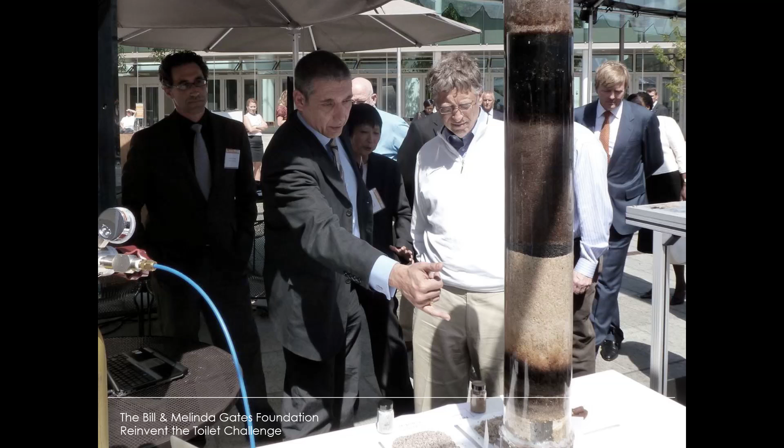And indeed, José Torero's interests are broader than the fire safety of complex environments. They include sanitation, waste management, and contaminated land remediation, betraying an inclusive approach to designing our world, an interest in enacting and preempting rather than simply reacting. As a winner of several prizes for the communication of science, he's shown here imparting his ideas on human composting and working his magic on an interested computer entrepreneur who just so happened to sponsor a new toilet challenge with the Dutch Crown Prince shown in the background.

In 2012, Professor Torero joined the University of Queensland as the new head of the School of Civil Engineering. And from what I understand, he's adjusting to Brisbane's climate very easily, possibly a climate of comfort to his now even more hectic professional schedule from down under. He continues his numerous international editorial, chairing and board duties in the field, but has also taken up research in and on Australia, recently by joining forces with architects to study the possibilities of designing tall timber buildings.

I don't have images from his proposals for additions to the University of Queensland campus, but only a few days ago the Office of Skidmore, Owings and Merrill released the Timber Tower Research Project in Chicago, which involves the participation of José Torero and the University of Queensland. We hope that through events like this we will steer his focus and time back to us, to explore how proper understanding of the elements we've been fighting for centuries can sustain and enrich our future spaces. So let tonight's lecture, How Do Buildings Burn, be the stepping stone for this new adventure. José Torero.

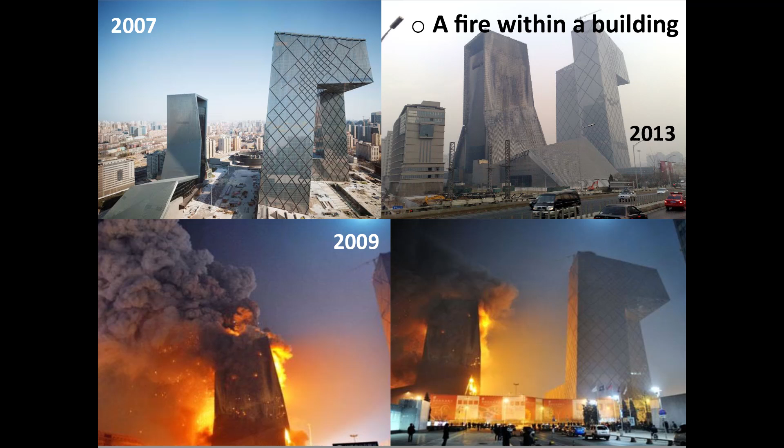Now, the other opposite scenario is when we have a fire within a building. So this is a fantastic building, the CCTV tower in Beijing, designed by a famous architect called Rem Koolhaas. Basically, the idea of this tower is that it's intended to be a dragon. So this is the head of the dragon, and this is the tail of the dragon. Unfortunately, in this particular case, the flames came out of the tail and not from the head. I mean, you're laughing, but this is a major fire.

Now, this is where the problem is. If I have a fire in a building, is this the intended consequence of the fire? The problem is not that I had a fire inside a building. I can tell you perfectly clearly that the probability of having a fire in a building is 1. It is going to happen. It might not happen today, it might happen next week, or it might happen in a few years, but somebody is going to do something that at some point is going to create a fire.

99.99999% of the times, the building will respond appropriately. And all of a sudden, what your fire was disappears. It's contained. It doesn't have major consequences, and it does not make the television.

But there is the occasional case, like in 2009, where a simple firework hits a zinc cladding in this particular building, and fundamentally the entire facade of the building goes on flames in less than 5 minutes. Fortunately, this building was empty because it had just been finished, and it was to be opened a few weeks later, and therefore there was nobody in the building.

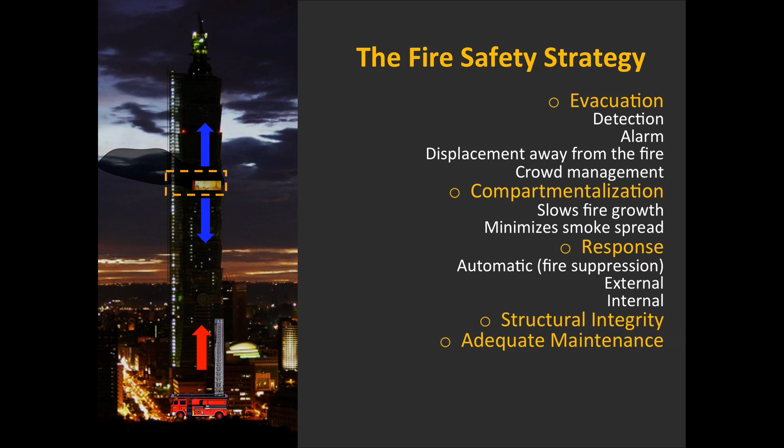A critical and extremely important thing in the fire strategy is that you require adequate maintenance. You're putting all these systems in place, and they're dormant, waiting for the fire to happen. If you don't maintain them correctly, with a proper maintenance program, then the day you need them, they're not going to work. So proper design and maintenance are the things that guarantee the fire safety strategy is going to work.

So in the end, a good strategy leads to an acceptable outcome, and that's the principle by which we solve the problem. The reason fires don't kill a lot of people is because we have a good strategy, properly designed and adequately maintained. Otherwise, when we have a fire, it will always lead to a disaster.

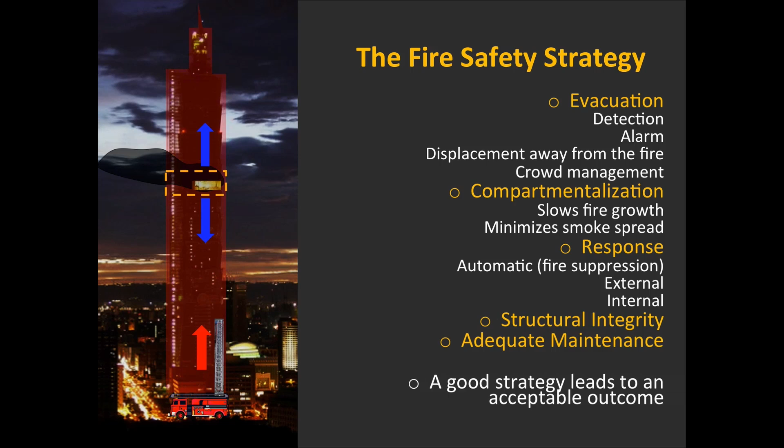Now, the truth is here you have a perfect example of an adequate strategy. Here you have a fire in a tall building that is perfectly contained to a floor, perfectly compartmentalized by fire doors, so it doesn't move beyond this particular space. That's exactly the way it's supposed to work. It's a cheap, old housing building for low-income families that nevertheless works perfectly well.

There you have a very good fire strategy, very robust, working adequately. A bad strategy would have allowed the fire to propagate upwards and downwards, with smoke coming out from left and right, and all sorts of other issues that in this particular case are not happening. So as simple as it looks, this is an adequate fire safety strategy for that particular building.

Now let's go a step back to the origins of fire safety. How does this cycle happen, and how did we evolve in this process? We have all these pictures of the Great Fire of London, of the Great Fire of Chicago, of the Great Fire of this and that.

The bottom line is that this was the no-strategy solution. In the past, before all these great fires, nobody really understood fire enough to put an appropriate strategy in place, so we found ourselves with these massive conflagrations. History has a whole list of them starting from the 1600s all the way forward. Only by the end of the 19th century do we start realizing what was going on, and recognizing that we needed to put a fire strategy in place. As you see, it's an evolution process.

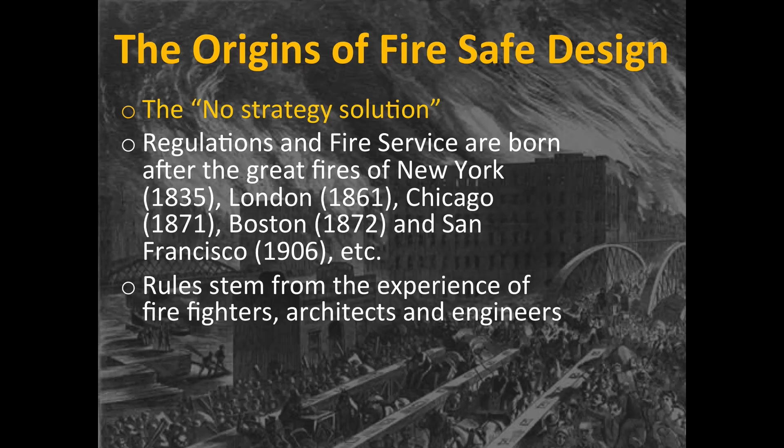We created all these new rules that we call codes and standards, which fundamentally emerged from the experience of firefighters, architects and engineers of the time who didn't really understand fire. Fire is a combustion process dealing with fluid mechanics, heat transfer, and all these things, none of which were understood at all at the time. So it was experience-based codes that were created, putting cities in place in a way that led to better outcomes. But the truth is, there was a very, very poor understanding of all these processes we now call fire dynamics, structural behavior, or human behavior.

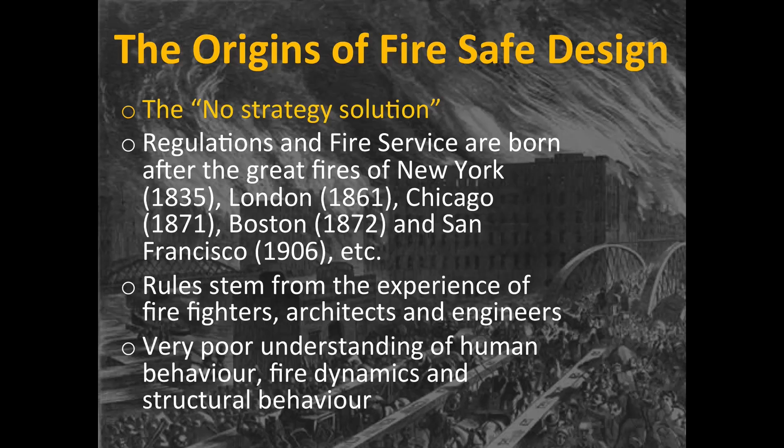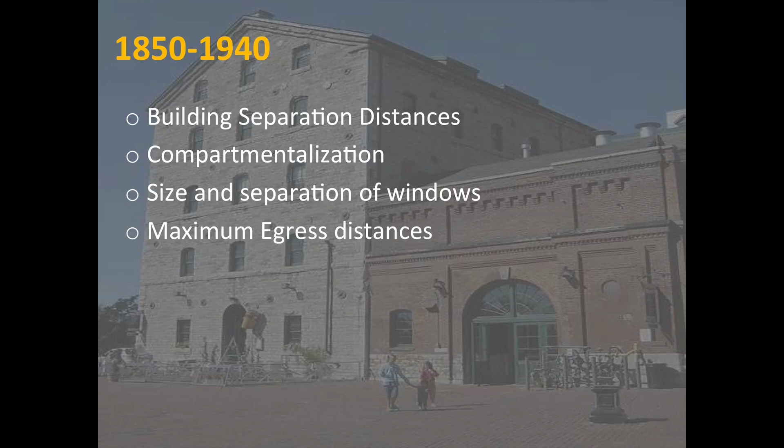It was just an intuitive thing, and we came up with a big list of rules. Those rules created separation distances, forcing us to separate buildings from each other with big gaps that prevented fire from spreading from one building to another. Where we couldn't separate buildings, we created compartmentalization, building walls that prevented fire from going from one building to the other. We created size and separation of windows that prevented flames from going from one window to the other, and maximum egress distances that guaranteed people could get out of the building before conditions became intolerable. And the list goes on and on.

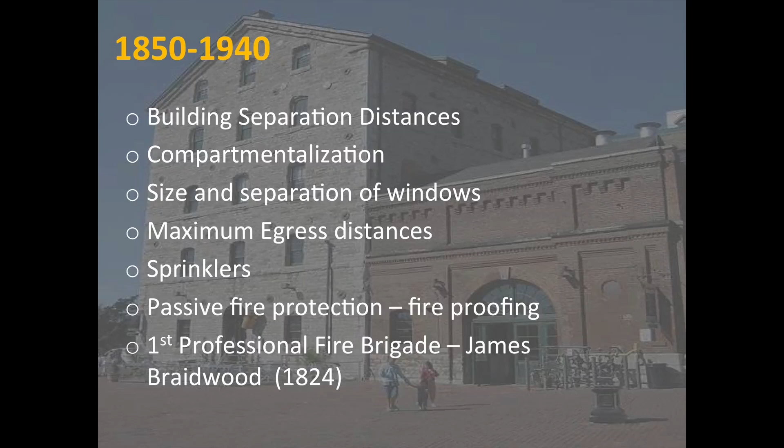We put a whole series of rules in place, including the professional fire service, which actually started in Edinburgh with this gentleman called James Braidwood, the first professional fire master. So basically we created all these things intuitively, with very little knowledge, to try to enable us to deal with the problem appropriately.

One of the big things we created, a very interesting one, is the concept of fire resistance. If you look at this picture, it's very interesting because you have a nice fire-resistant beam and very poorly performing non-fire-resistant beams—this is timber and this is steel. Steel had entered the construction industry at the time, and after the Industrial Revolution people didn't really understand how to use steel appropriately in construction. There was a whole bunch of disasters that resulted from this.

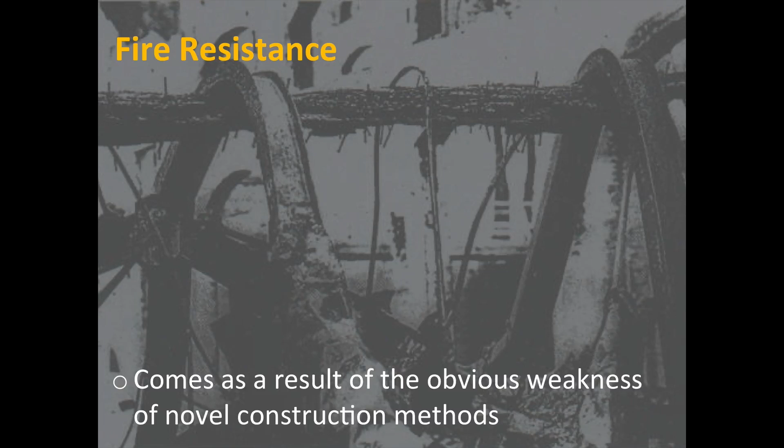So the concept of fire resistance emerged as a result of the obvious weakness of these new, novel construction methods. We created this concept to respond to this new problem that came with the introduction of steel into the construction system. So what was the concept of fire resistance? Basically this little curve, with time on the x-axis and temperature on the y-axis, representing what we call the standard temperature-time curve.

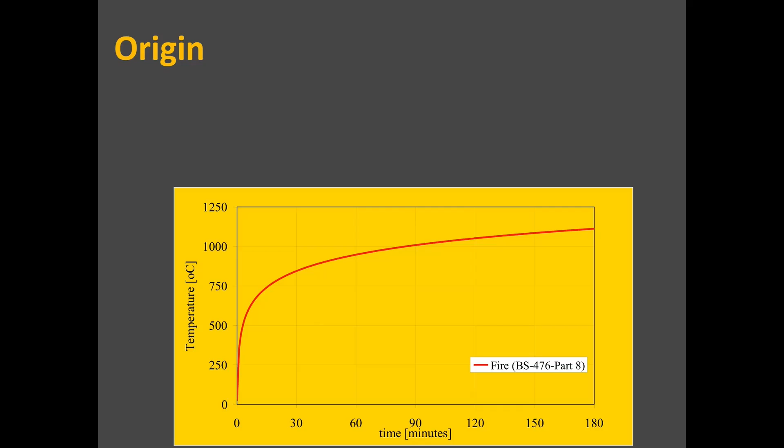So what is the standard temperature time curve? It becomes the worst possible fire you could possibly have. So people start burning in a box, as fast as they could, throwing wood in there to try to make sure they got the hottest possible fire they could get.

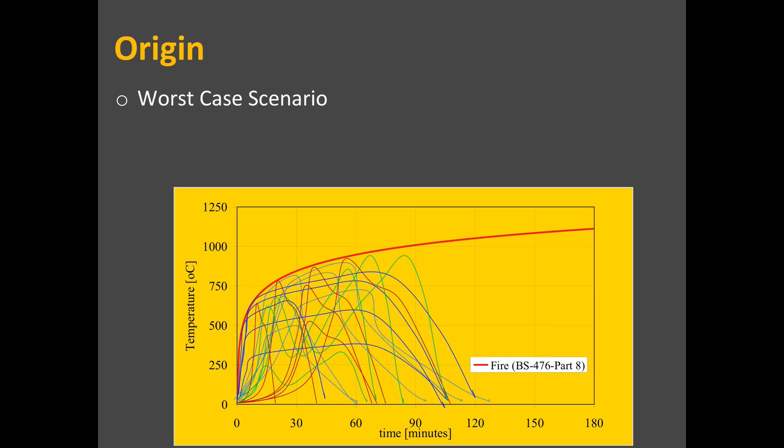So they repeated the test a number of different times to try to achieve the worst possible fire scenario. They ran the test hundreds of times until they finally created a whole set of curves, and fundamentally they drew an envelope to it. Now the fire could not be worse than this—this is the hottest possible fire you could get.

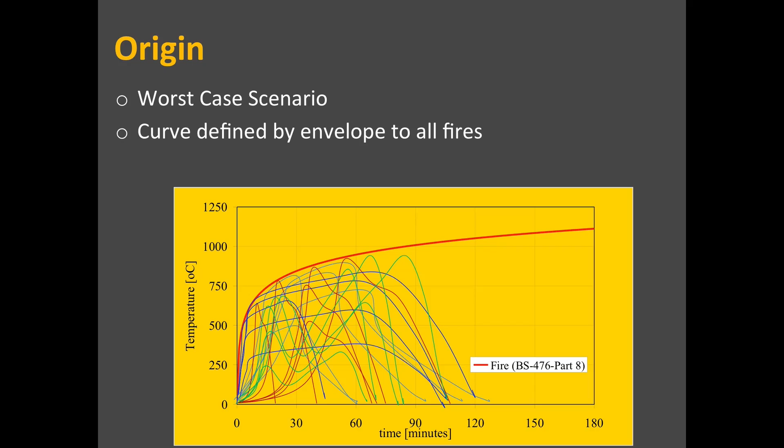It was the envelope to every single test that they had done at the time. Now the fires, as you put the fuel in, they heat up, they burn all the fuel, and then eventually they die. So basically what they did next is they defined what they call the fire rating. And what is the fire rating? It's the time that the building has to withstand.

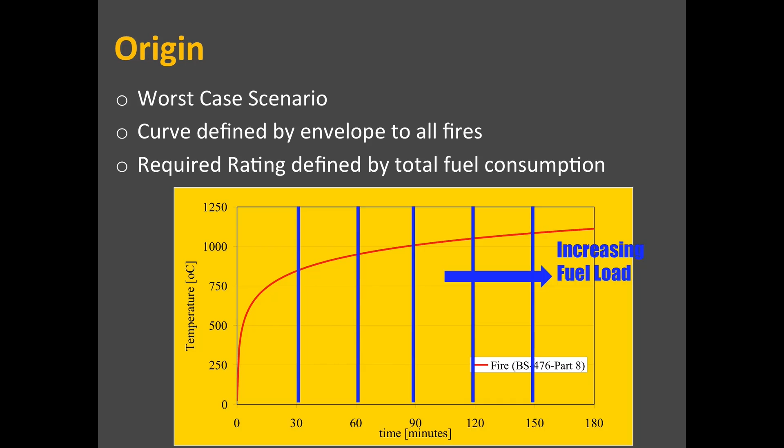How did they define that? They defined it on the basis of how long it would take for the fire to burn out. If I have 60 kilograms of fuel, how long would it take to burn out? How many kilograms does an office have? 60 kilograms per meter square. So if that takes 30 minutes to burn out, then I will say the required fire rating for an office is 30 minutes. So what am I guaranteeing?

That I get the worst possible fire for the longest period of time. So if instead of having an office, I have some sort of factory, where instead of 60 kilograms I have 120 kilograms, then it takes 60 minutes to burn. So I define a fire rating requirement of 60 minutes. If I have more fuel, then I put 90 or 120 and so forth. So as I increase the fuel load, I increase the rating.

So if you think about it, what I've created is the worst possible fire for the longest period of time. Can it be any worse? It can't—it cannot be longer because I've already burnt out all the fuel, and it cannot be hotter because this is the envelope to all that.

So then what happens if I test my structural systems and they don't fail under these conditions? Can they possibly fail in a real fire? They can't, because the fire cannot be hotter and it cannot last longer. So if they don't fail in the test, they will never fail in a real fire.

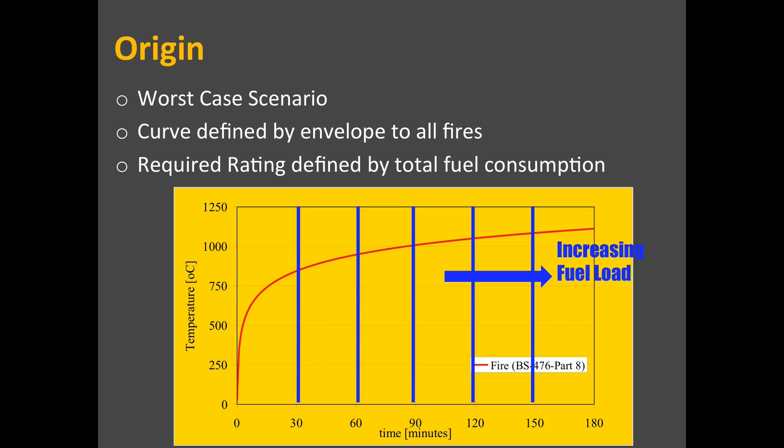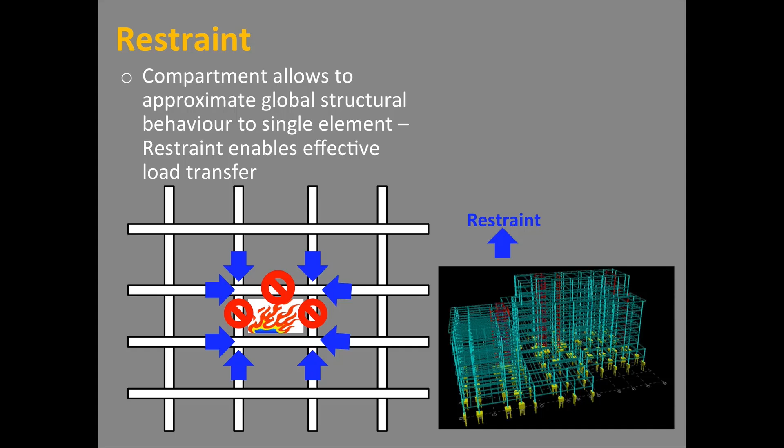So what we did is create all sorts of rules. We boxed the fire in such a way that everything around it is much stronger than what's happening in the fire. That means if this piece fails and the loads get redistributed, nothing happens because the failure cannot propagate. So I box the fire by creating compartmentalization, and I put the worst possible fire inside.

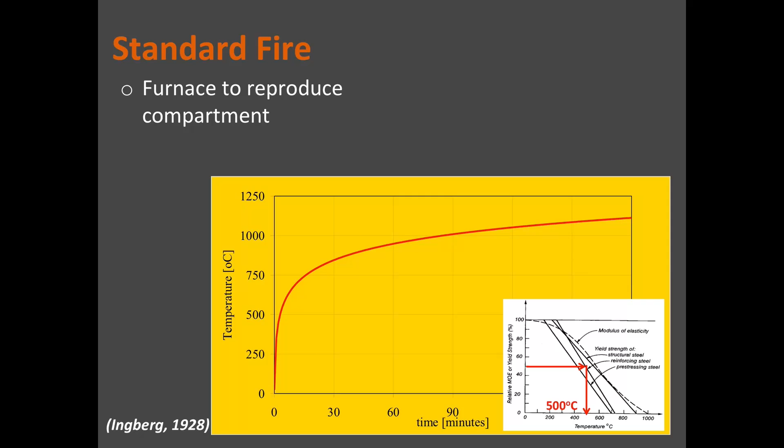So all of a sudden, if I take the test and reproduce that curve in a furnace, and I test my structural element, I find some failure criteria—what temperature the material fails at—then I can test the structural element and define, with that failure criteria, its fire resistance. So this beam that I put in here lasts 50 minutes. I take a safety factor and say it has a fire resistance rating of 30 minutes. If I require 30, then I'm fine. If I require 60, then I insulate it, put fireproofing on it, to make it 60, until this curve goes down enough to give me the rating I want.

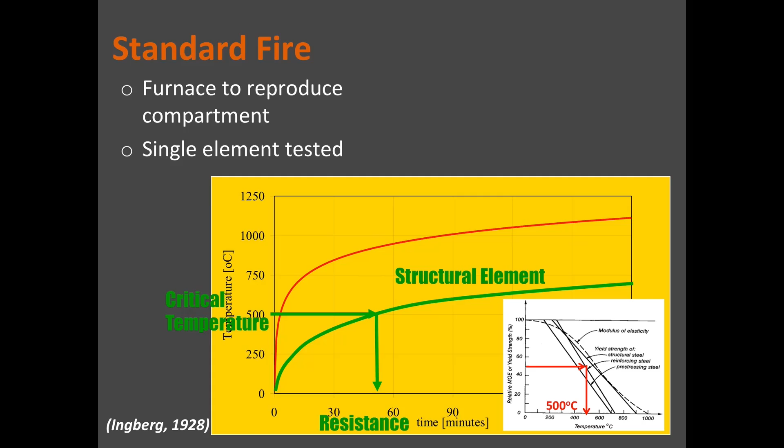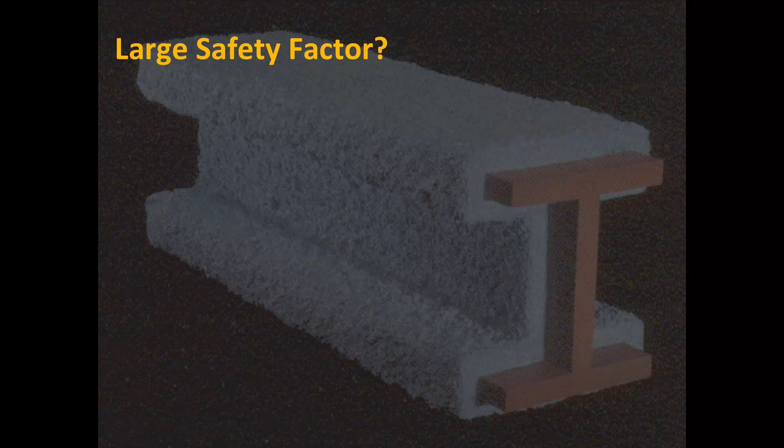Now, despite all the details, the fundamental fact is that I have a very large safety factor. Why? Because I have the worst possible fire for the longest period of time, and I'm testing my structural elements to meet that requirement. So why do I need that big safety factor? Because I don't understand anything.

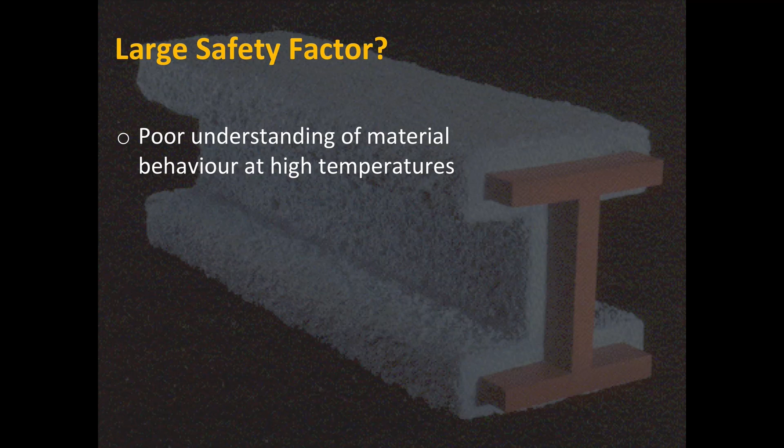In 1928, when we developed the fire resistance curve, we didn't understand how structures behave. So I put the worst possible case. Basically our poor understanding enabled us to do that—we didn't understand any of these things. So we put the worst possible scenario as a huge safety factor.

So fire resistance got embedded into codes and standards in 1928, and has basically lasted until today, and it was society's responsibility to guarantee safety. Huge safety factors? Yes. Can we live with them? Yes. Why? Because we don't know the details, so we have to live with those huge safety factors.

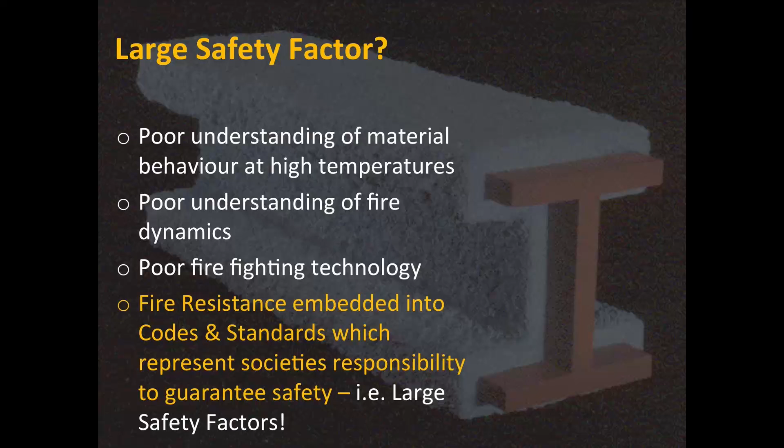So at the end, this was the result. I could guarantee to the structural engineer that no matter what he did, that building was not going to collapse in a fire. All of a sudden, I can build tall buildings. Why? Because people can be in the building as long as I protect them from the smoke, protect them from the heat, and move them slowly out in an effective way, the structure will never fail.

So height disappeared from the equation because the building will never fail. It will withstand burnout. The fuel will burn completely and the structure will remain in place. All of a sudden, you could do tall buildings. So this breakthrough in regulation enabled the construction of all these tall buildings.

So the real gain was that I had better informed codes and standards. I created a rule that enabled me to prevent failure at all costs. All of a sudden, I gave the structural engineers the freedom to build extraordinary buildings. And the result is that structural engineers transform cities. So this little piece of knowledge of fire resistance opened the door to the use of steel and concrete and all these new materials into building all these tall buildings.

So that's when we are ahead of time. We were ahead. We created the knowledge. We opened all the doors. And we created all these buildings that were fundamentally safe from a structural perspective.

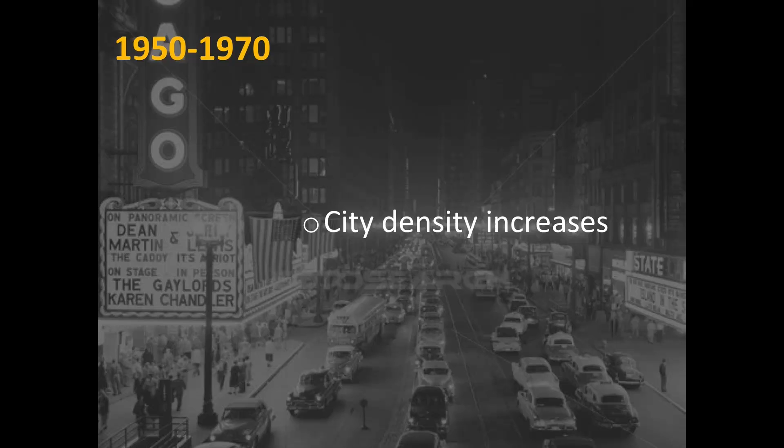What happened after? What always happens. Cities start transforming themselves and changing all over again. City density increases, building complexity increases, codes and standards start falling behind. And we hit the 1960s. Every fire that has a name happened in the 1960s. The Joelma, the Andraus, the Dupont Plaza, every single fire that we've given a name happened in the 1960s.

Fundamentally because we introduced plastics into buildings, we eliminated the concept of compartmentalization because we wanted open space, open floor plans, and all these things. All of a sudden, all these rules that we had put in place start fading out because we forgot how buildings burn. We completely forgot about the processes that actually make buildings burn.

And the result is that we got huge problems with smoke management. Smoke in the MGM Grand Fire in Las Vegas, fundamentally it was a problem of smoke transport. Smoke filtered through all these ducts of HVAC and all of a sudden started killing people that were literally 10 stories away from the origin of the fire.

We had problems with material selection. We put plastics all over the place. This is the Joelma building and you had plastic cladding that burned all the way to the top.

And all of a sudden we had a fire that had spread beyond the area of origin. We had huge structural problems. We had two concrete buildings collapse in Sao Paulo, Brazil, and so forth. Fundamentally, the complexity of what we did with our built environment challenged all the knowledge that we had built in the 1940s. We found ourselves with buildings that were way beyond the complexity we could manage, and we forgot completely how buildings burned.

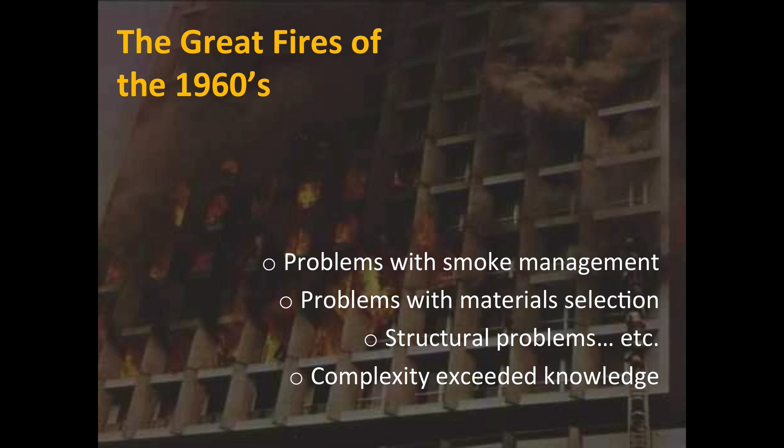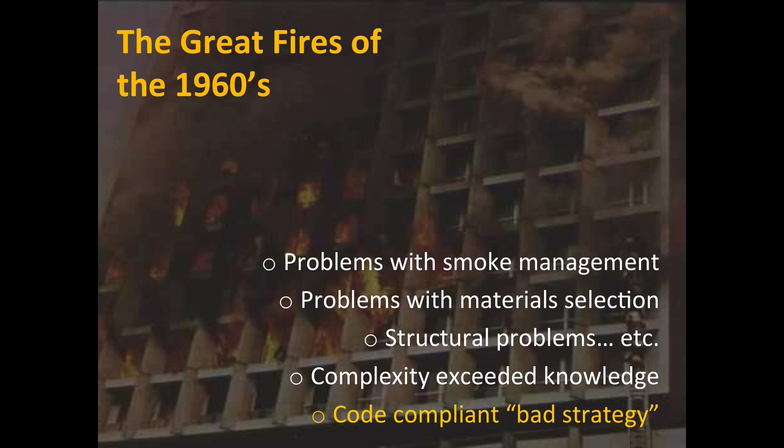Our codes that we relied on, that we felt were very appropriate, were not appropriate anymore. Once again, code compliant became a bad strategy. We were a very rigorous code compliant society that had created a whole set of rules that served us well until the 1960s. But in the 1960s, it became a bad strategy, and the result was all these big fires that we had.

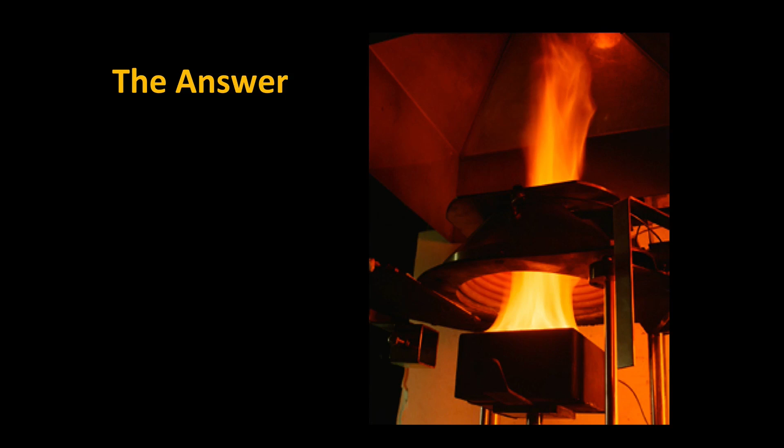Of course, what is the answer? Reactiveness. All of a sudden, design by disaster, we had all these major messes. What did we do? We started throwing millions at fire research. Everybody was working in fire research, new methods, new tests. Of course, we had tests that were designed for timber, and all of a sudden we're burning plastics. Plastics melt. We were not taking that into account. Timber produces certain toxic compounds, plastic produces others, and so forth. So we created basically new methodologies, new models, new calculations, and all of a sudden everything starts changing.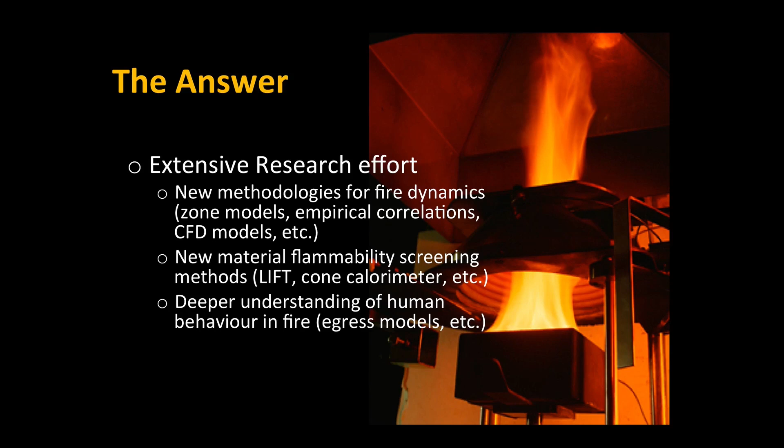Our understanding of fire becomes a lot deeper at every level, human behavior, fire dynamics, everything. So we understand everything much better. And all of a sudden we realize, wow, this is getting very complicated. It's not about just simple rules that anybody can apply. We need engineers to understand this. We now have tools that require the competencies of an engineer.

So all of a sudden we start getting higher education programs. At the end of the 1980s, you start seeing universities teaching fire safety in certain places. In Australia, it was Victoria University, University of Western Sydney. In the UK, it was Edinburgh, South Bank, Ulster. In the US, University of Maryland, WPI, Tokyo University. All sorts of places start popping up fire engineering programs because these tools now are not for everybody. All of a sudden, they require people with a certain level of competency.

Because a big change had happened. Until then, our game was knowledge-informed codes. So what were we doing? We were learning, improving our codes. And the result, we had better rules. But the rules were rules. It's a recipe, like baking a cake.

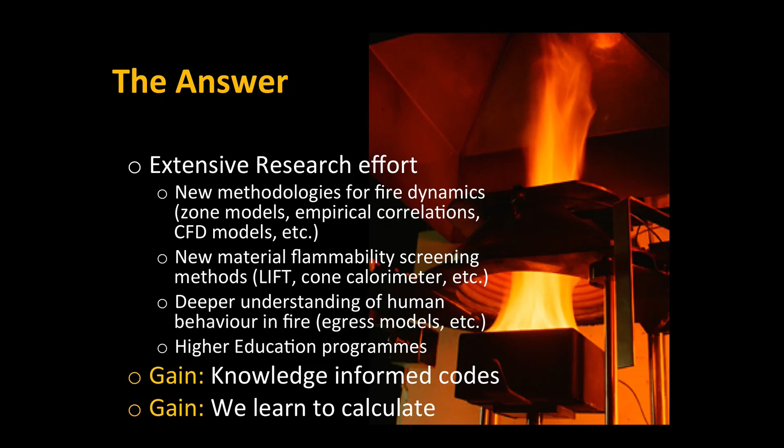What happened in the 1980s is that we learned how to calculate, and all of a sudden we became an engineering discipline. That engineering discipline now had tools that require engineers to be able to develop them. So the problem is a transition, because we started designing for implicit performance, which was basically code-based design. If you follow the rules, it's going to work. How well is it going to work? I don't know. How big is my safety factor? I have no clue. All I know is that if I follow the rules, it will work.

That's implicit performance. Now, the problem with implicit performance is that it's one size fits all. I classify a building as a hotel, and I design all the hotels with exactly the same rules. Now, think of what that means. It means that you standardize the space. So every architect is going to complain when I tell them that they have to box their egress paths. It looks ugly. It loses functionality.

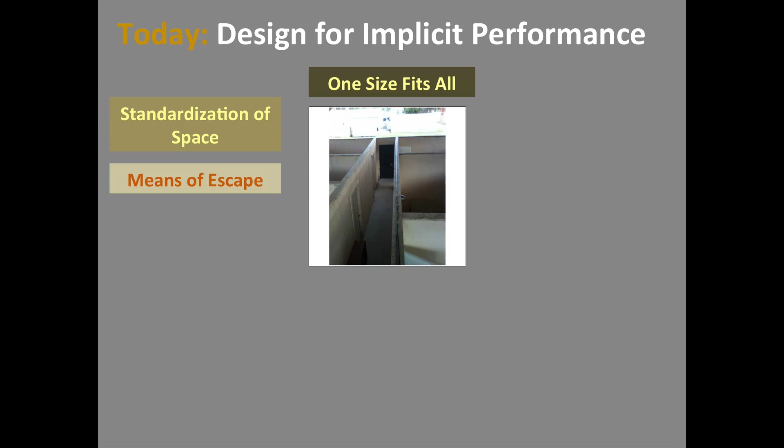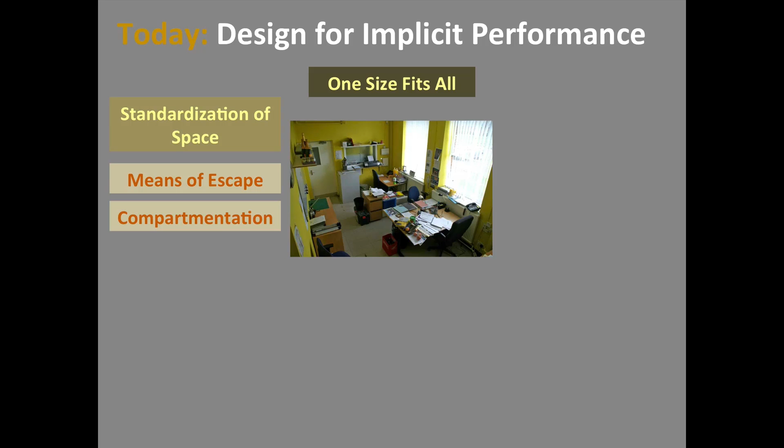All my means of egress become unused space that is designed only to be used in the event of a fire. We don't like that. It implies compartmentation, so we need to box every room. What about the open floor plan? Oh, that's too complicated, we cannot do that. Box it again. It's constraint after constraint after constraint.

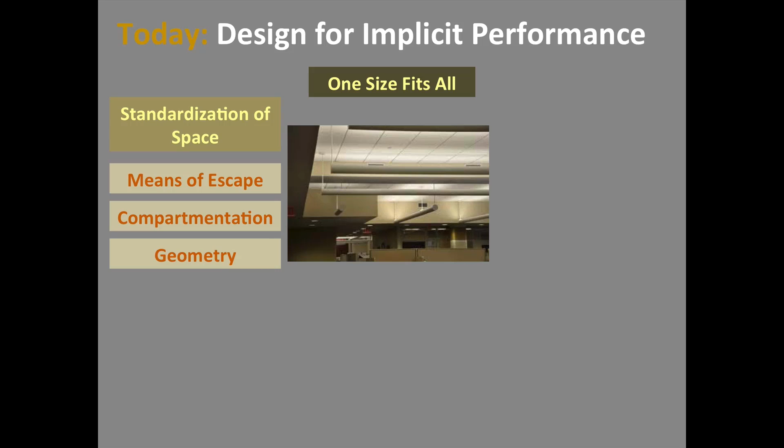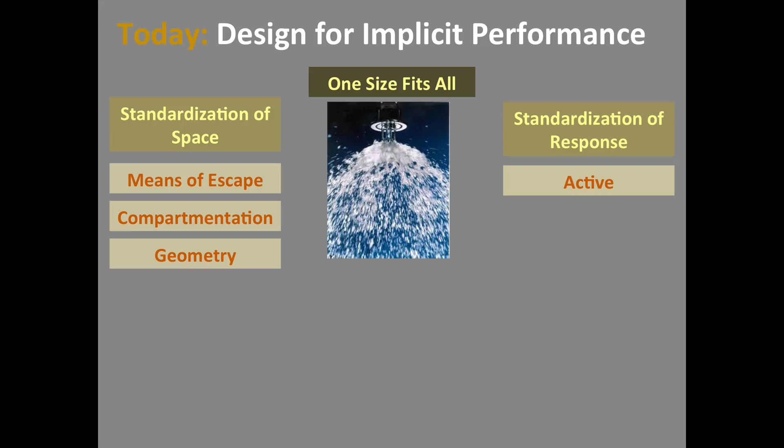We change everything, the geometry. You cannot even design a roof or a ceiling without constraints associated to the smoke detectors, the sprinkler systems, all these different things that start messing with the entire fabric of the building. That's not nice. If people complain about these things, architects don't like fire engineers when they tell them they have to do all these things. We standardize response and we stick sprinklers everywhere. These little things stick out from every ceiling, but what if I want a really nice white ceiling? All of a sudden, you standardize it.

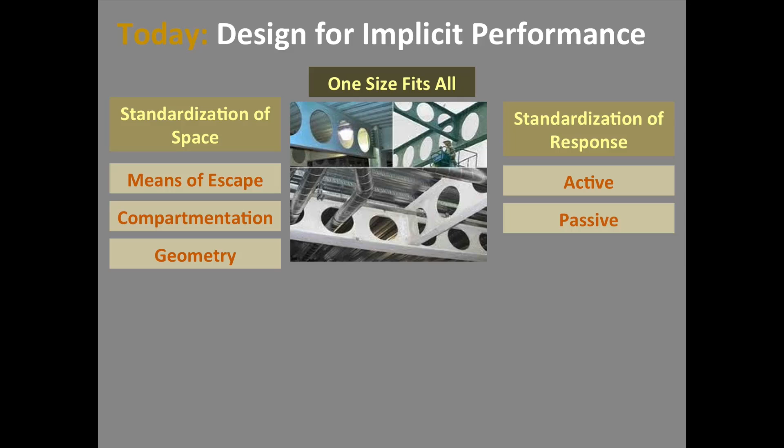You standardize the fireproofing, and you want to have an exposed structure. That cannot happen, you have to cover it with fireproofing. Yeah, but it's nice to have the steelwork. Man, sorry, you have to cover it. So the fire service gets completely standardized and professionalized, and you have all these things going on.

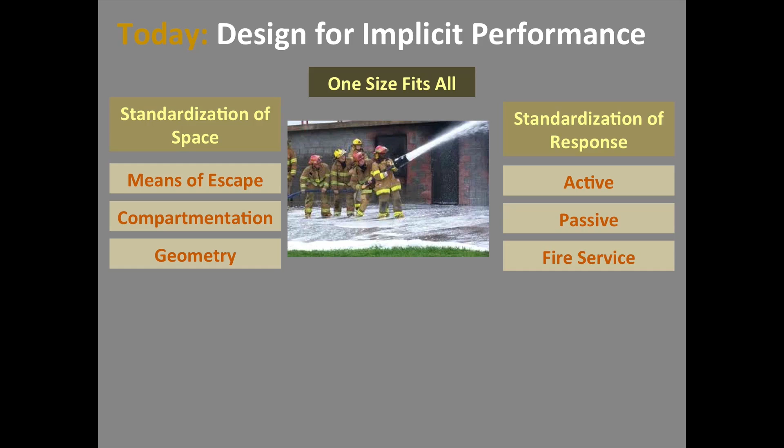But this implies an enormous cost to be able to keep this idle workforce waiting for the fire to happen. So fundamentally, this approach of one size fits all has enormous safety factors, but not only enormous safety factors, but also a loss of function.

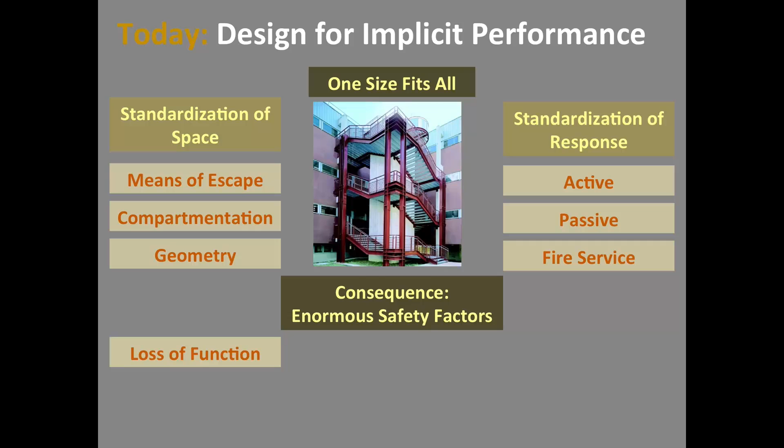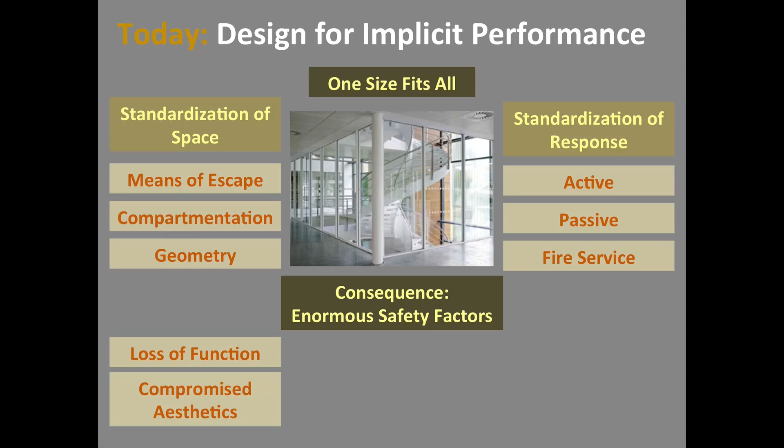Who wants to have a stairwell like this in the back of their building? Nobody. But it's an egress path, and I need to have two of them, so I don't have anywhere to put them. Let's put it in the backyard. Okay? And that's what ends up happening. An architect wants to have a feature staircase, a little beautiful spiral stair — box it. Because it's a vertical shaft, and that puts the smoke in place.

It's a mess, an enormous waste. This is foam that is in a hangar when you're trying to fight an aircraft fire. Okay, and enormous safety factors.

You know what the safety factor of a sprinkler system is? 10,000. I'm not joking, I'm being serious. You throw 10,000 times more water than the one you need. Why do you do that? Because you have to cover for every possible size of fire that you have. One size fits all — the same sprinkler is going to kill a little fire as it's going to kill a bigger fire. So you have to over-dimension the system to a point that is absolutely unsustainable.

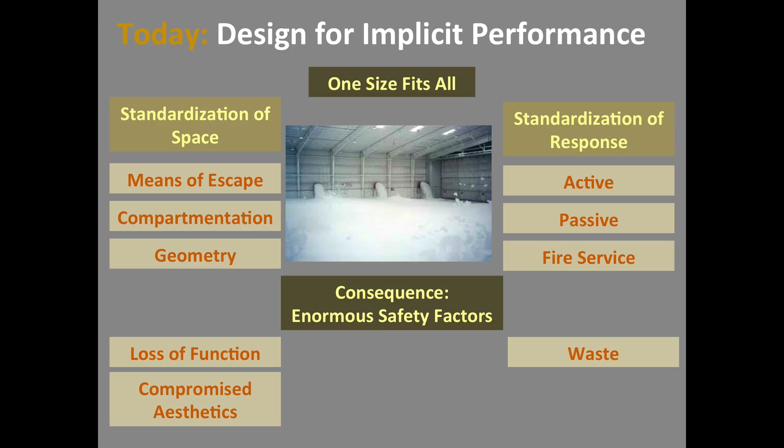The main problem with implicit performance is, despite the fact that you're putting a huge safety factor, you can never spot the mistakes. Why? Because it's implicit performance — you follow the rules. But if somebody did something that might have fallen within the rules, but it was novel, different, whatever, that somehow took us outside the picture, we cannot spot it. So we have these unidentified mistakes all over the place.

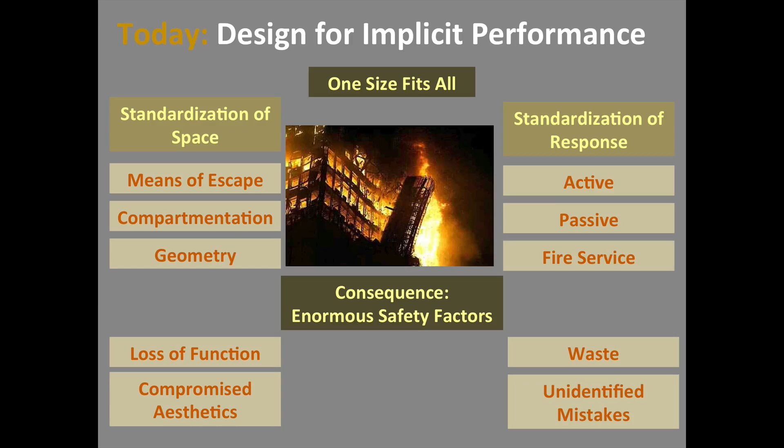This is the Windsor Tower fire, a perfect example of the failure of a curtain wall. So what's the problem with all this? It's an unsustainable strategy. We went from no strategy, to a code-based bad strategy, to an unsustainable strategy, where the waste and the over-dimensioning and the unidentified mistakes are so large that fundamentally we find ourselves in situations like this.

This is the World Trade Center, and people will argue anything you want about it, but that was an engineering mistake that we didn't notice. It was a structural failure that was not anticipated by those who designed the building, and could not be anticipated, because the codes didn't require the level of analysis that would have identified the weaknesses of that structure. So fundamentally, this is an unsustainable strategy.

Now, what's the alternative? The alternative is what has happened in the last decade. So what used to be a very nice strategy of basically blocking and boxing the fire has all been transformed. And fundamentally, we have accepted this idea of performance-based design. What we learned in the 80s and 90s, now we are using as tools for design, using engineering tools in a way such that we can have explicit performance of the building.

They change from the implied to the explicit. Calculate the performance of the building to establish what is the effective safety factor, and what is an appropriate safety factor that doesn't waste and gives you the right answer. So the focus on sustainability, and not losses, is what has changed in the last decade. We want to have the right solution at the right cost, at the right level of waste, with the safety factor that is adequate for the problem.

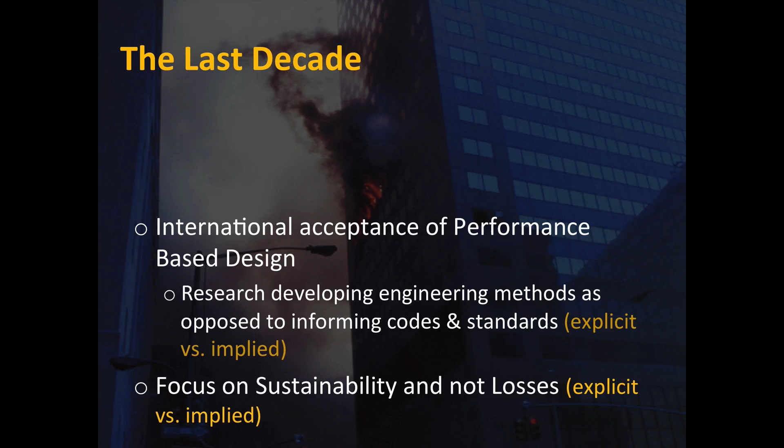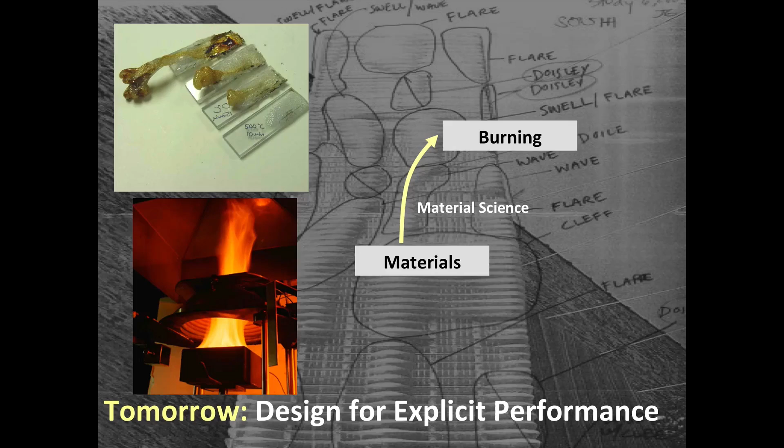Now, the unfortunate or fortunate thing is that to be able to use this kind of tools and do explicit performance, you're addressing a completely different problem. You're not dealing with the codes and standards and the rules and the recipe. What you're dealing with is a problem that starts with the material, the way it burns, material flammability, that eventually produces smoke and heat transferred through complex turbulent flows and very complex combustion chemistry, where the heat transfer and fluid mechanics are going to heat up the structure.

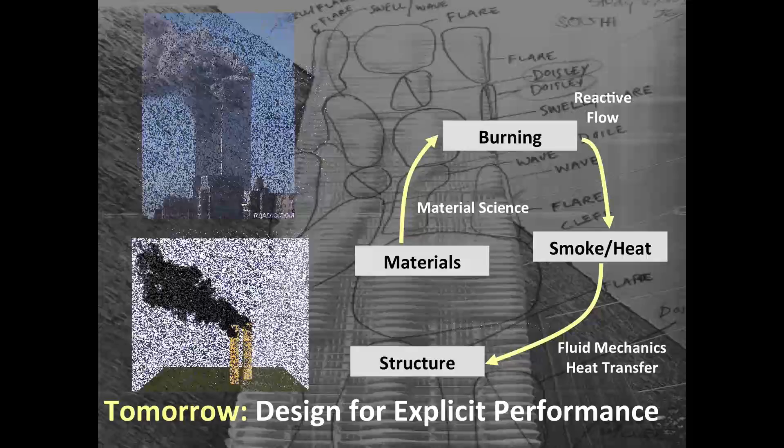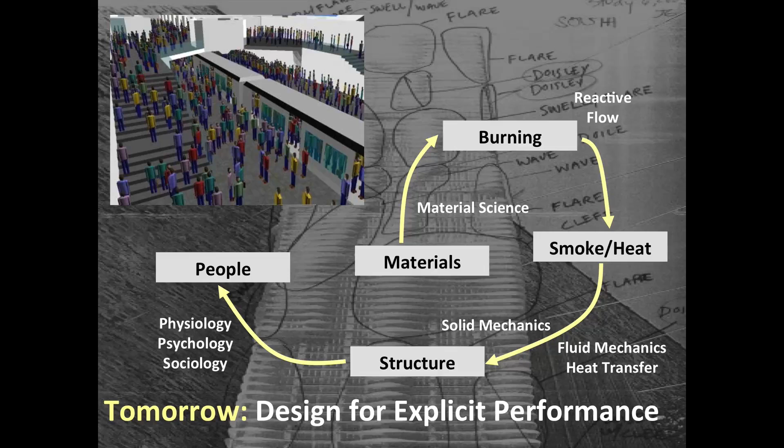And effectively, you have to understand the structural behavior in such a way that you know how this building is going to perform. That structural behavior then has to enable people to evacuate in an appropriate way. So you need to understand the physiology, the psychology, the sociology of people moving within the building, so you know what time you need to get them through the system in an effective manner. You have to be able to convince the architects to introduce this into their design practices. That's a big challenge, believe me.

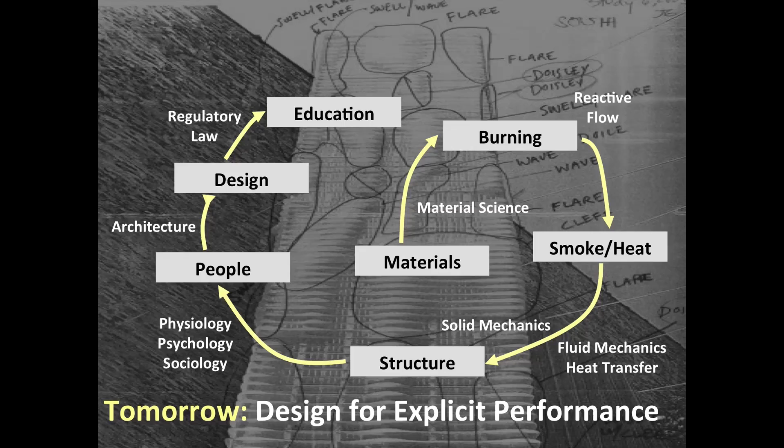The problem is that this has to be embedded within the education of people, so that the regulatory law and everything we have that guarantees this process works actually works. There's an element of education, accreditation, and understanding all these things that becomes very important. But this is truly the only sustainable way, because it's the only way you get the proper safety factors and understand explicitly what the performance of your system is going to be.

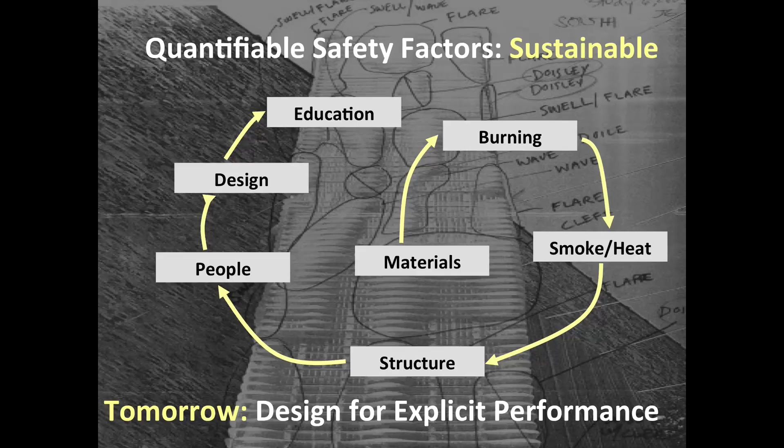So at the end, this is where we are aiming, this is what we're trying to do. But we need to understand that this is also in the context of the way in which we build. Construction detailing is a very practical thing. It's all very nice to have this great knowledge and deliver wonderful buildings, but if we don't construct them correctly and don't do the detailing the way it's supposed to be, we're going to get it wrong. Here's a perfect example of how things can go wrong.

Today we use curtain walls. A curtain wall is very different to old-fashioned construction, in the sense that instead of being attached to the concrete slab, it is hanging from the concrete slab to give continuity. What is so different about that? If I have something sitting on the concrete slab, it's the concrete slab that protects me, it separates the floors. And if I design the concrete slab correctly, I can guarantee the fire will not move from one floor to the other.

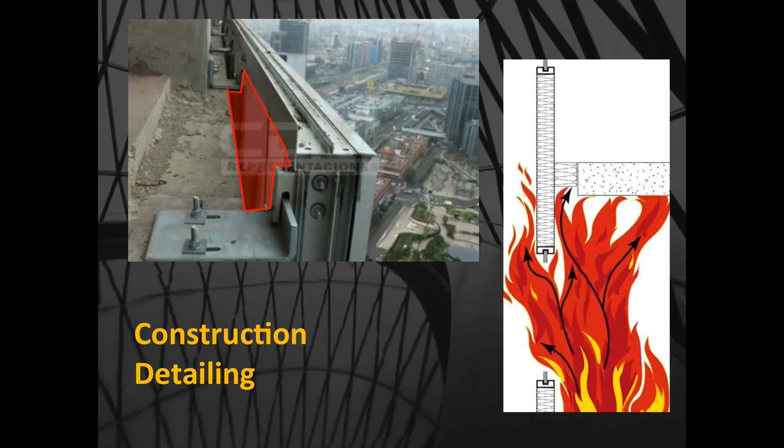So what is the sustainable strategy then? Now the problem is complex. What happens when you have a very, very complex problem? What happens when you want to get brain surgery? You have a tumor in your brain and you want brain surgery — who are you going to call? Your friend? The fire service? The paramedic? The nurse? Who are you going to call? The doctor. What is the difference between the doctor and everybody else? That's the competent professional, no?

If you want to design a fire safety strategy, who is the competent professional?

This is a very complex design process and requires a high caliber professional. What defines a high caliber professional? This is something most people don't understand. What is the difference between profession, occupation, and trade?

A profession is something that regulates the individual. When a doctor becomes a doctor, it's the doctor that you're regulating, the individual that you're qualifying. And then it becomes a monopoly. Only doctors judge doctors, only doctors accept doctors, only doctors criticize doctors. Nobody can criticize a doctor other than a doctor because they don't know enough, they're not competent enough, because it's too complex a discipline for anyone from the outside.

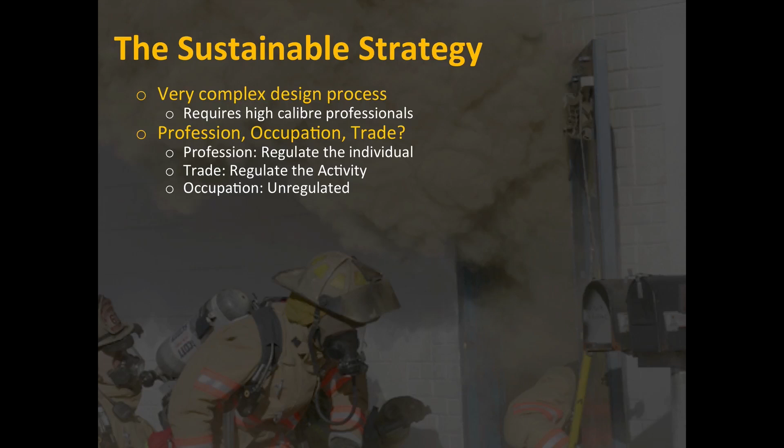Recipe for disaster. So all of a sudden we're talking about regulation. In the case of a profession, it's the accreditation. In the case of a trade, it's a code of practice. We eliminated the code of practice, and we never put in place an accreditation.

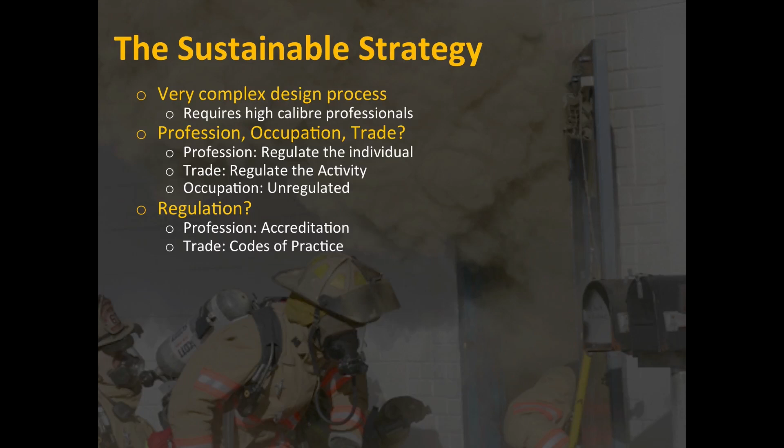Beyond that, the accreditation is the prerogative of a professional body. But it requires, in the case of engineering, a two-tier system. One that accredits a university or a degree enabling you to say you have the capacity to learn how to learn, that you're ready to enter the professional world and start learning on your own. Once you enter the professional world and start learning on your own, your experience gets accredited by the professional body, and you receive your certificate saying you're a professional in the discipline.

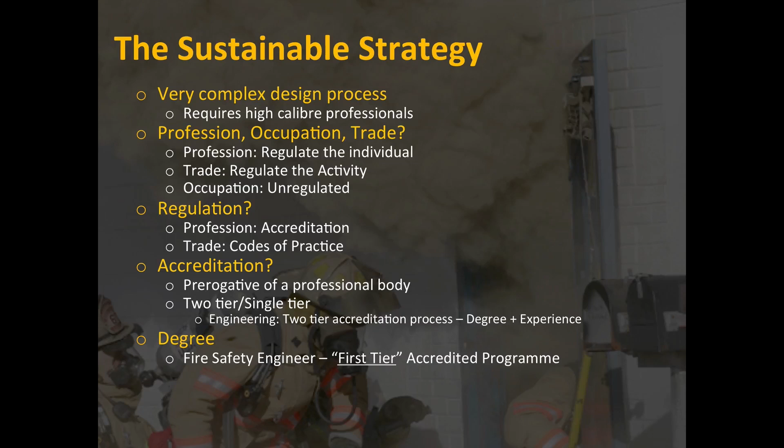For this one, we have the experience tier, but we forgot about the universities. We never developed a proper degree in fire safety engineering, despite now recognizing it as a profession. In principle, the degree is a necessity for a fire safety engineer, a first-tier accredited program. Today, Australia has none. Australia has one of the most liberal and oldest regulatory systems in the world, allowing pretty much anything, and yet it has never produced an accredited first-tier university degree. That is a big challenge that needs to be addressed before we can achieve a proper sustainable strategy.

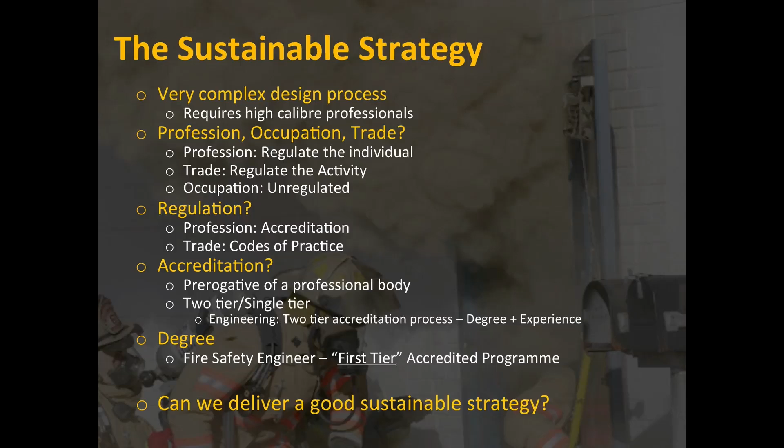So the question is, given how we operate today, can we deliver a sustainable strategy? I leave that question for you to answer. But the one thing I can say is, if you ask why buildings burn, fundamentally they burn for two very simple reasons: one, because they're poorly designed, and two, because they're poorly maintained. Now the question is, do we actually have the framework to guarantee properly designed and properly maintained buildings, given how fast the construction industry is evolving?

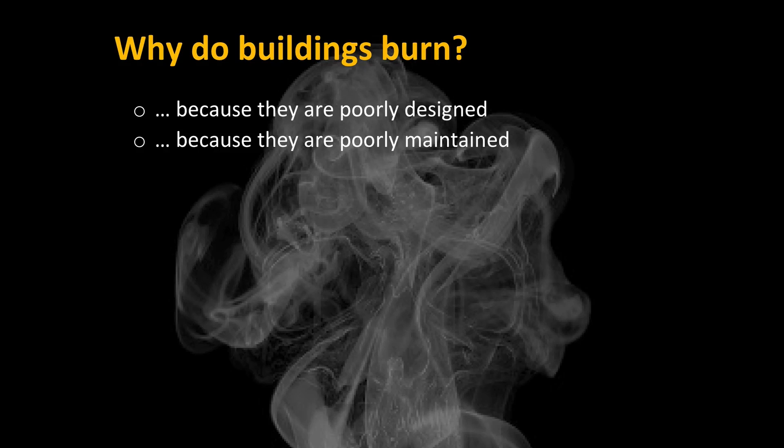As I say, I'll leave that to you, because the problem is that if we don't, then in the end we have a poor fire safety strategy. Thank you very much.